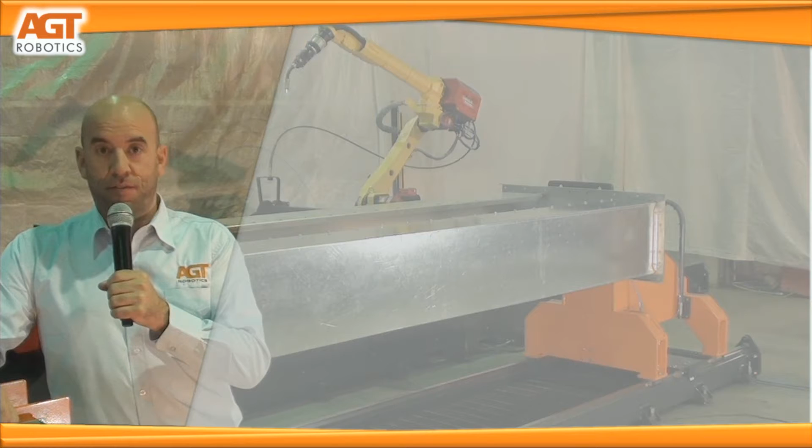Okay, hi everyone. My name is Louis Dicaire. I'm the VP Marketing and General Manager here at AGT Robotics, based in Trois-Rivières, Quebec, Canada. Today we'll have another webinar featuring robotic welding for one of our customers here.

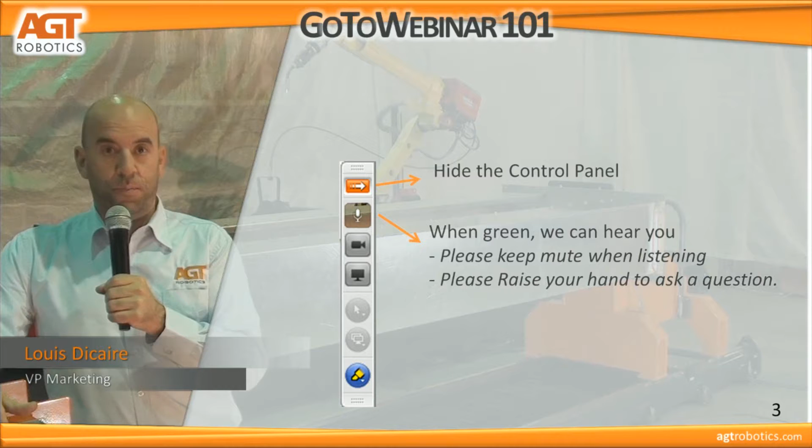And so basically we'll discuss a little bit about AGT, a few words on who we are, what we do, what are our standard line of products, explain to you what's that specific application, and then go directly to the demonstration where we'll have first a blank run and then welding demonstration.

So a few words about AGT. We've been in business since 1992, and since day one we've been in the automation sector and the robotic sector. So we've done hundreds, if not thousands, of machines over the past 20 years. One of our major shareholders is Fonds Manufacturier du Québécois, which is sponsored by CDP Capital, a big investment firm that has $159 billion of assets.

I'm originally from the company Orus Integration. We were a Vision Integrator, and we were acquired by AGT in 2010. Our focus right now is combining vision and robotics to tackle low volume, high mix applications. So basically where the standard robotics would stop, that's where we start for impressive solutions. Today, you'll see a solution with a pretty standard robotic solution a little later.

So a few words about our standard line of products. We've developed that starting in 2010. So we have the Beammaster Fit and Weld. It's a 3-robot, 8 3D scanners, 2-line solution to automatically scan the parts, pick them, position them, tack them, and then eventually weld them. All of that fully automatically from a few clicks from the CAD.

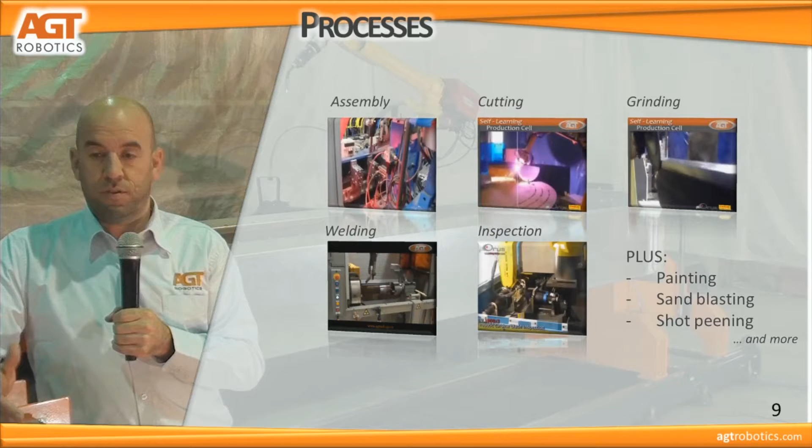Processes we master: basically all the processes involved in the metallic industry. So first of all, assembly. We have also cutting, whether it's laser cutting or plasma cutting. If we cut, in some situations the process will need a grinding pass to have a better surface finish at the end. Of course, welding, which is the focus today, and inspection.

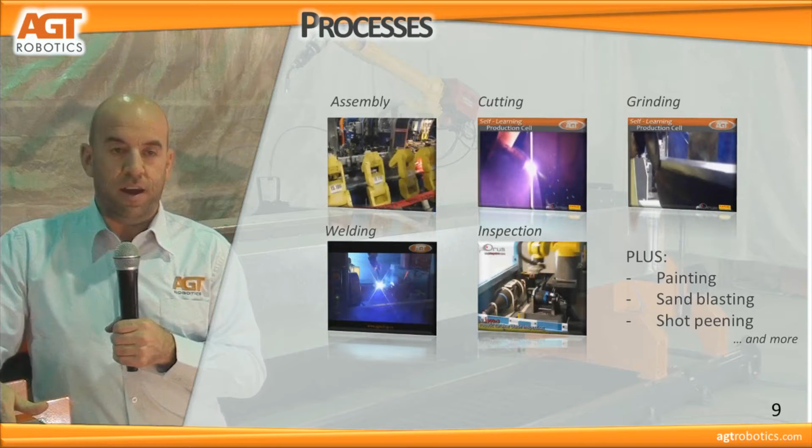So inspection, sometimes it's for quality purposes at the end of the process, but it's even more useful when you add inspection throughout the process, so you can validate each step and prevent adding value if a certain step has been defective. So you can detect defects, but you can also characterize the part so the next process adapts itself to the different tolerances that were just scanned or evaluated. Of course, we have other processes like painting, sandblasting, shot peening, where we will partner with other integrators, suppliers, or specialists to provide a turnkey solution.

So on the configuration side, we've split that into three different sections: the mechanical aspect of it, the programming, and the compensation. So on the mechanical aspect, that's a simplified way of showing it, but you can have a static robot with a few positioners in front of it. We can put the robot on a rail, and then you can basically travel almost as long as you want. It's very useful for many applications. Actually, the application you'll see today includes a robot on a rail.

And the third mechanical setup is the robot mounted on a gantry. So you add sometimes 2, 3, even 4 axes to tackle applications where you have long and large parts. On the programming side, there are 3 ways of programming. The first way, the most standard one, is using the teach pendant. That comes with the robot, and basically any robotic technician or anybody at your place can use the teach pendant to program the robot.

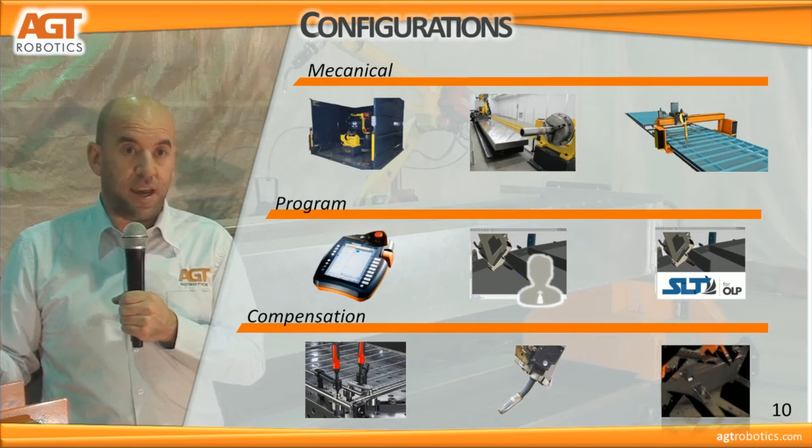And finally, and that's our forte at AGT, we can use many 3D scanners to make a complete 3D image or point cloud of the part to be processed, and then manage the compensation accordingly. So why robotic welding? The main reasons are these 5. First reason, quality. Of course, if you use a robot that's very repeatable, it's like having your best welder on duty, fully attentive all the time.

Productivity. The process won't be that much faster with a robot because the process will kind of be the bottleneck. However, arc-on time is where you'll get the most out of a robot. Where a manual welder can spend 10, 15, or 20% if he's very good, of his time actually welding, the robot can reach levels of 50, 60, 70%, depending on the mechanical setup and the buffer zones you can add to the system.

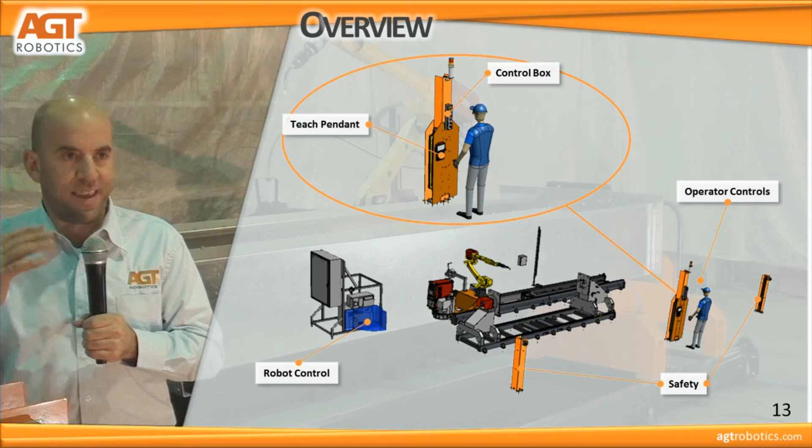Now, back to our specific application. If I do a general overview of the system you'll see today, you have the operator console with the teach pendant to operate the system. You have the robot controls that are hidden behind the white curtain, behind the rail. And you have all the safety features, the laser curtains and the safety relays and everything to manage the robotic cell, so it can be accepted by the CSA norms here in Canada, and also the UL and CE norms all around the world.

Now, if we focus on the robotic system itself, the robot is a FANUC robot with a Lincoln Electric welding source. Everything is mounted so the source will follow the robot along with the wire itself. And we have headstock and tailstock positioners that handle rotation over 360 degrees. We also have a clamping system with specific jigs to handle that specific part, so we can load it using a lift truck and then squeeze the part between the 2 positioners.

So how it works: first the operator will put the part inside the positioners using a lift truck. He will use the button to clamp the system together and then use the teach pendant to load the right program. So let's say this is part A. You will find the program for part A, hit start, and then the rest is done completely automatically. That's what you'll see in a few minutes.

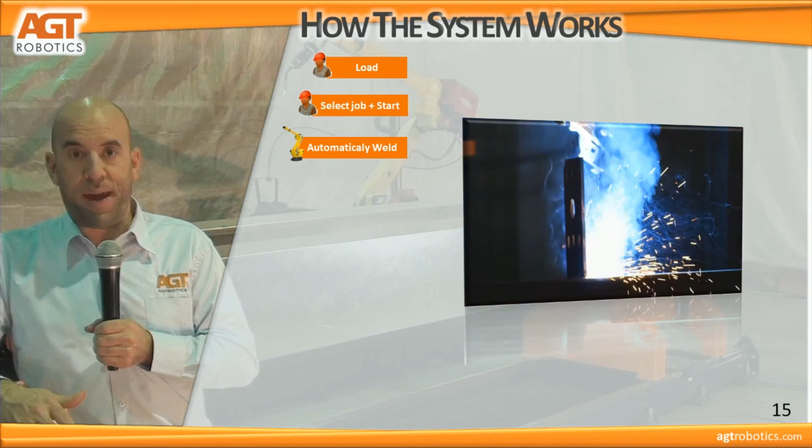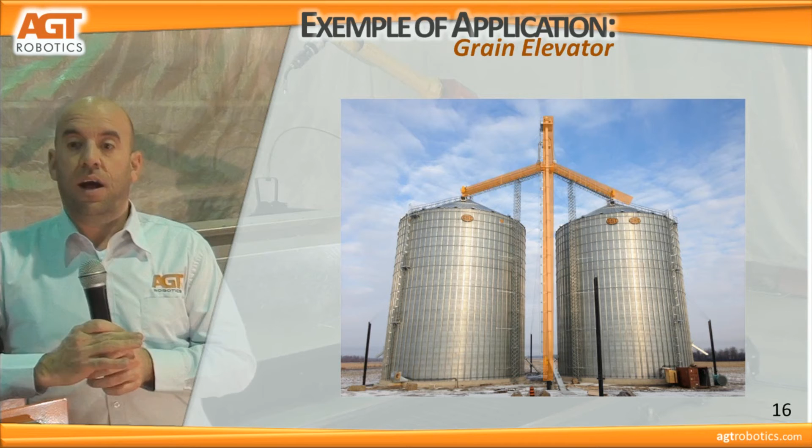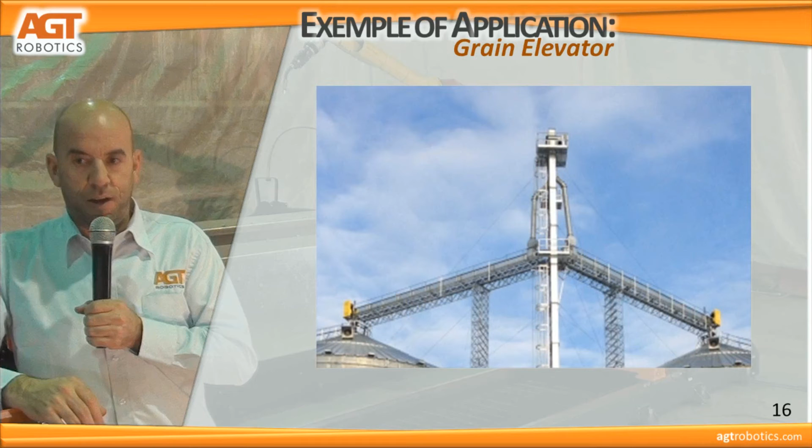Of course, once the system starts, the positioning and the welding are done automatically. So a few words on the purpose of that part. This is a manufacturer here in Canada. They manufacture parts for grain elevators. So this is a grain elevator. We'll zoom in on the section where the part we produce goes. So it's the top section. This is galvanized steel, and this is what you'll see in a few minutes.

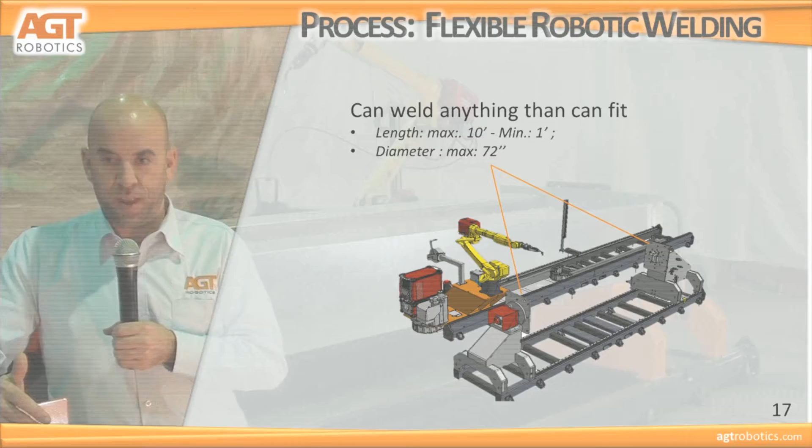So a few technical words. The system has a footprint of about 15 feet by 20 feet. The maximum parts supported are 10-foot long pieces, with a maximum diameter of 72 inches. Of course, these are the limits and requirements for this specific system and that specific customer. We could go longer, we can add more weight, so basically this could be customized to your specific application.

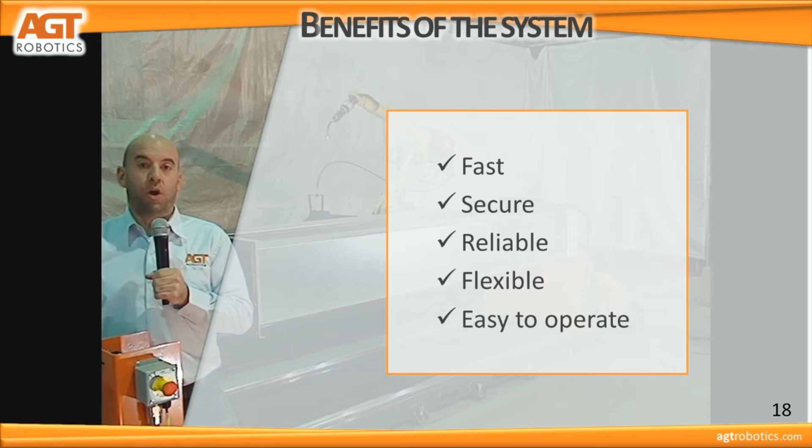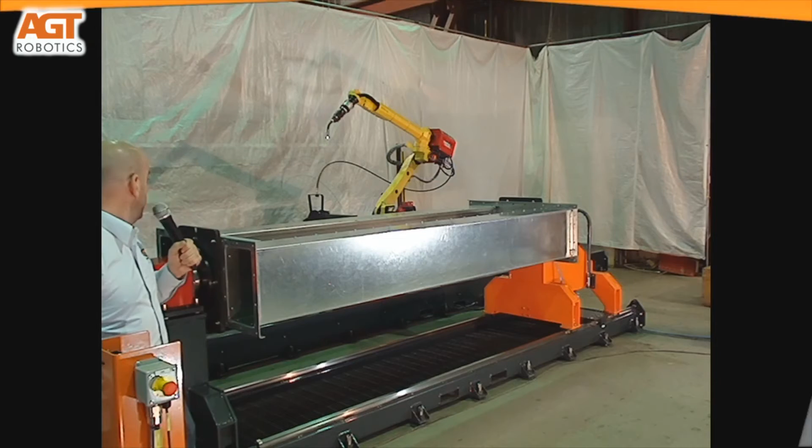Just before going to the demo, a few things to remember on the benefits of the system. It's fast, secure, reliable, flexible, and very easy to operate, as you'll see. So we'll go on with the demonstration. The first thing I will do is secure the part in place. The system would be open like this. The lift truck would come up and position the part in it.

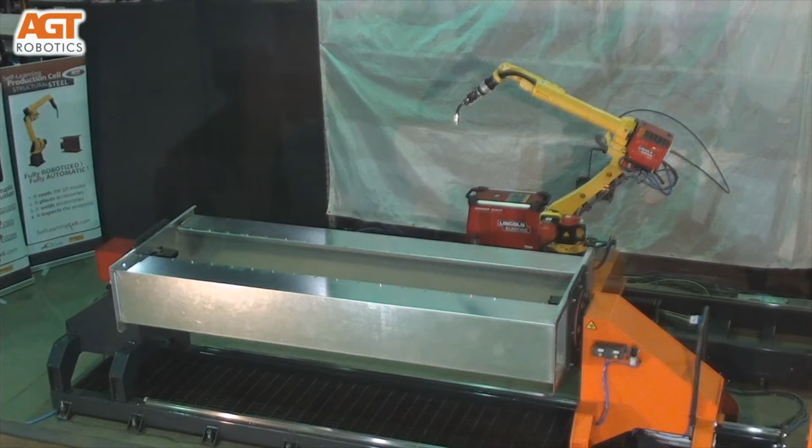Once the part is in position, just by pressing a button, there's an auto-centering feature where the part is auto-centered, so the robot can execute its schedule exactly at the right place. And then using the teach pendant, we just select the right program and execute it. What we'll see right now is just a blank run, so it won't weld, and then we will redo it with the welding activated. So let's start.

So a few specs on the process itself. We're using a solid wire. We're using weaving in the process. It's a silicon bronze GMAW wire of 35 thou. And right now the joint you'll see is a lap joint, 1/4 of an inch.

Okay, so now it's time for questions and answers. I think we had a few, but for most of them we already prepared answers for general questions people usually have. One question you may have looking at this system is if we can do the same kind of system with cylindrical parts. The answer, of course, is yes. By using the headstock and tailstock linked to the controllers, the robot and the positioner can work in conjunction to make very good quality and assure the right positioning.

Another question that comes up is on the welding time. Typically, the process itself, as you can see, is quite fast. It will probably be as fast as your best welder, but it's mostly on quality, and where you will save time is mostly on arc on time. The positioning of the part, the fact that the robot doesn't take any break, doesn't need to stretch or anything. Typical arc on time for manual welders will be between 10, 15, 20% of the time. With a robot, with the right configuration and positioners, you can reach 50, 60, 70% arc on time in some situations, and that's where you'll get most of your payback.

Last thing to mention on this system is the second zone. The system was already configured with additional security, so we can add a zone quite easily. By extending the rail and the positioners, or adding a second set of positioners, that's pretty easy to upgrade in the future.

I think we have another question. Okay, we have a question on multipass. Typically, it's possible to use a robot for multipass welding. It's pretty easy to get to 3 passes. For the root pass, you would use either a pre-programmed approach or a laser touch, or you can even scan the entire joint to position the part. And then the second and third pass would only use pre-programmed offsets from the root pass.

In some situations, we could go 4, 5, 6 additional passes. Then we would have to look at the situation in more detail to see what the quality requirements are. Because the more passes you do without rescanning, the further you'll get from your nominal, and it's very important to control all the passes to get good quality.